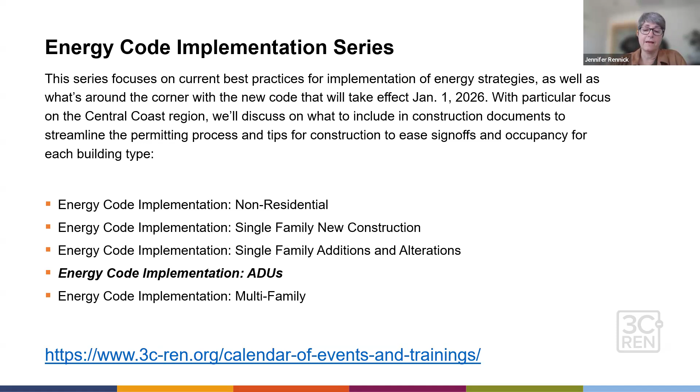Today, we're going to do the code implementation. It's for ADUs, accessory dwelling units. It's part of our 5-course series for 3C-REN. And today we do have learning units for architects. If you need AIA learning units, you get 1.5. And if you're ICC and need those learning units, you get your 0.15.

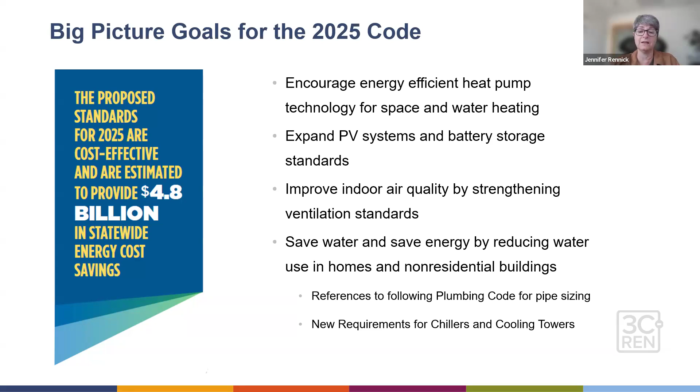And there have been updates on plumbing and piping sizes and chiller and cooling tower requirements for non-res occupancies to save water. All that together is going to help the state continue its progress, saving the state $4.8 billion. The process for adopting the energy code every 3 years is very robust. It includes stakeholders and a lot of public outreach and meetings, which we all can participate in. The state is working on the next energy code cycle, so now's the time to get involved if you're so inclined. And a reminder, the code's going to come into effect January 1st.

But big picture on the residential high-level changes, especially for architects: when you get your new energy reports for 2025, there is going to be a new metric. It seems like we were just getting everyone used to the EDR metric, which was kind of like a golf score, a ranked score. And now we're going to have a metric that is based on long-term costs. I'll have a slide there just to give you a reminder.

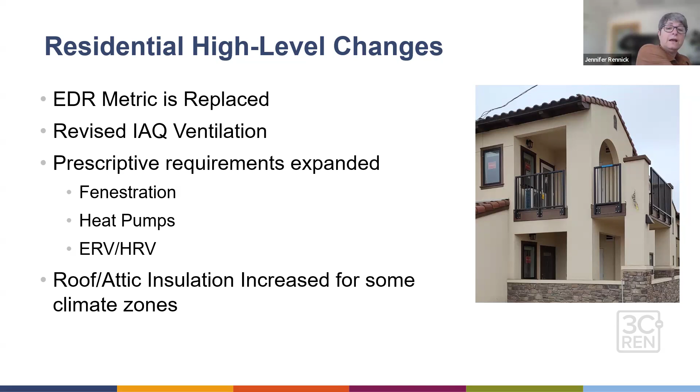So single family metrics for the performance method, and your additions and alterations when you're doing the performance method, which I'll remind everyone what that means. Performance is the computer modeling; I'll have a slide on that in a moment. But I wanted to give folks an update that the EDR score is going to be replaced with something called LSC, for long-term system cost efficiency, and it is going to be in dollars per square foot.

But I want to clarify that it's not really the cost that your client, the homeowner or the renter, is going to see. This is more looking at costs that impact the big picture for what the state is doing in terms of cost effectiveness for saving energy and resources, also including carbon impacts. The goal is to better account for the impacts of burning fossil fuels, both at the site, directly burning it for our appliances, but also as fossil fuels are still a source of electricity. We burn natural gas in generators that generate our electricity, and we're moving towards more all-electric homes and buildings, combined with increasing battery and other renewable capacities. So this new metric is to better take that into account.

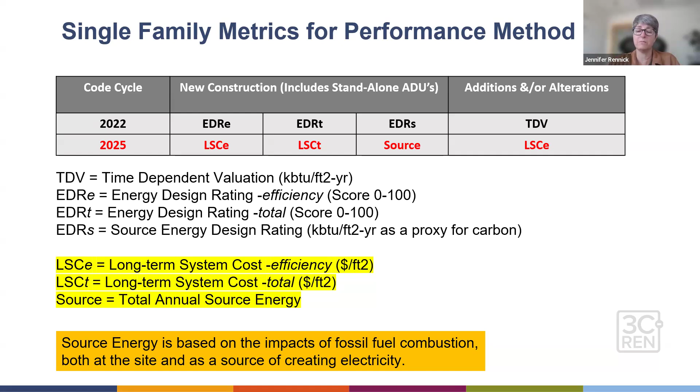HERS. A lot of you architects know you're going to have HERS raters and HERS projects, and a HERS registry to register those Title 24 CF1 documents. Under the new code, there isn't a lot of change that we'll see as architects, but HERS, just FYI, gets a new name. It's now going to be called ECC, for Energy Code Compliance Rater, but they'll still do the same envelope leakage testing, the field verifications for refrigerant charge, your exhaust fans, kitchen hood fans, HVAC efficiency, duct testing, etc.

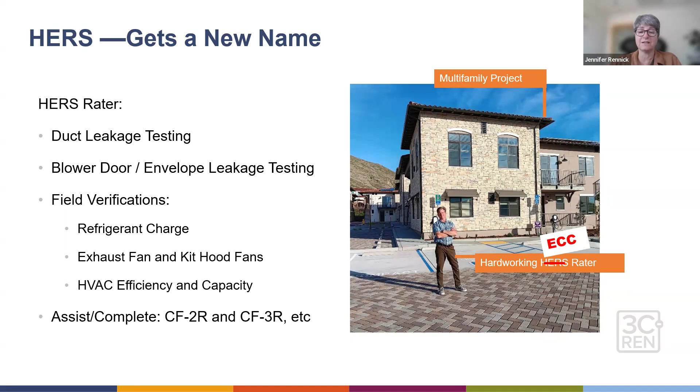And 3 terms that we use throughout, just a reminder: your mandatory requirements are energy efficiency measures that are applicable to all projects. I tried to color code the slides, so if it's a mandatory measure, you'll see orange at the top. If it's a prescriptive component package, you'll see blue, and prescriptive is essentially following a checklist. Some of the things you have to do for your projects are prescriptive, and there are measures required for that prescriptive approach that would still be considered a prescriptive requirement, even though you still need to do it; it's essentially following a checklist.

And then the performance method is your computer application or energy modeling. And I'll put that in gray. And this is where you can have trade-offs. So if the checklist approach isn't working for you, you can trade off, say, exterior wall insulation for a better hot water heating system. And as long as your proposed building's energy budget is less than the standard budget, you're good to go.

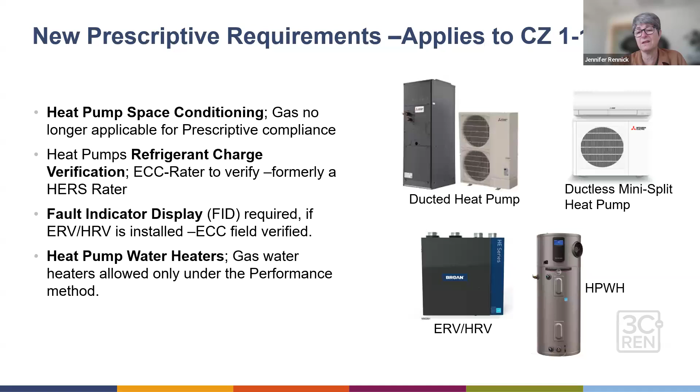And then for your heat pump water heaters, gas water heaters are still allowed under the performance method. Again, you have to use a computer method for that. But otherwise, heat pump water heaters are the new baseline. And that's where a lot of the code changes we're seeing for these residential occupancies are, a lot around the heat pump water heater.

Okay, now, unless there's a question about that, I'm going to move on into the accessory dwelling units themselves with a little bit of that background. And so some of that background, it's important to understand where now the code's going to shift, even though a lot of what we're going to talk about for the accessory dwelling units is more or less the same. And so that's the good news for the architects, that there isn't a lot that you have to worry about for the upcoming code change in January.

So our accessory dwelling units have been shown throughout the state to help with affordability, primarily because no new major infrastructure is needed. There's also opportunity for extended family to join folks by having an ADU on their property, it also gives people rental income to help with affordability, and it allows for some flexible living so that people can have the main house and then have the ADU, and they can now create a space where someone could age in place.

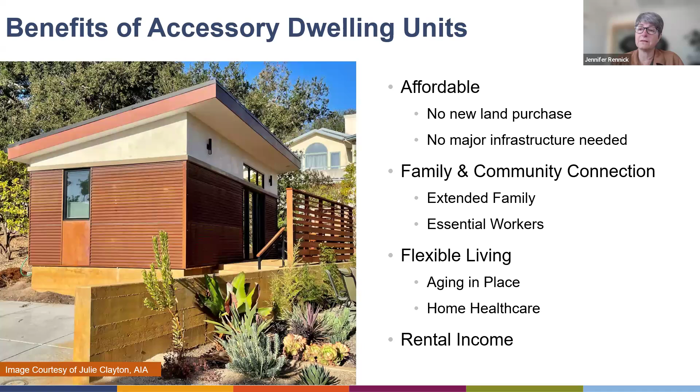ADUs have become very popular, and there are pre-reviewed or pre-approved plan sets available. We'll have a little bit more to say about this, but just as a heads up, if we have any homeowners on the call, this is available for you to use in many jurisdictions. And if we do have any homeowners on the call, then when we get to the hot water heating section, that's the place you're most going to want to pay attention, because of the plan set you may be looking at and the timing of when you are going to get your permit.

There's a great resource for accessory dwelling units at the California Department of Housing and Community Development, www.hcd.ca.gov. It's the Accessory Dwelling Unit Handbook. And I just want to give a heads up that if you've looked at it in the past, they just updated it as of January 2025. I think this is a good resource, and I noticed that some of the questions and answers have clarified some of the issues people are having with building ADUs, especially around multifamily projects that have ADUs and what's allowable.

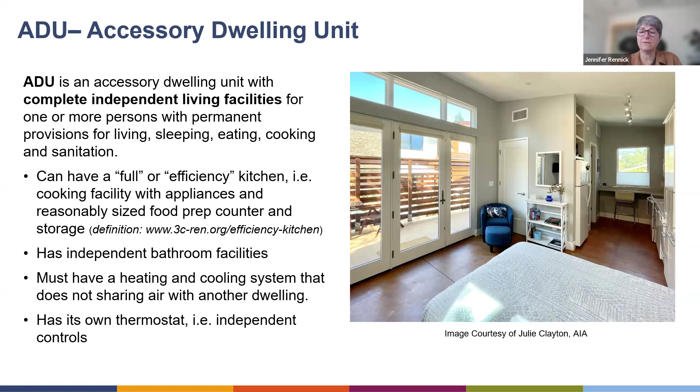And in this picture, thank you, Julie Clayton, local architect, there's a bathroom behind the refrigerator and a closet there, and then a small efficiency kitchen on the right-hand side, and then the rest of the living space. So that all met the definition of accessory dwelling unit.

The junior accessory dwelling units, JADUs, a lot of times these are conversions of existing space, as long as it's not greater than 500 square feet and it is contained entirely within the existing structure or proposed single family residence. So it's possible to have a new construction build that's single family, but within that whole single family, you have a portion of it that is delineated as a junior ADU. That's okay. And you can have an efficiency kitchen in it.

You do have to have a door to the exterior. And it's okay to have another door that goes to the interior of the space, and it can have its own bathroom, but it may also share the bathroom with the rest of the house. And then that kind of meets the definition of junior ADU.

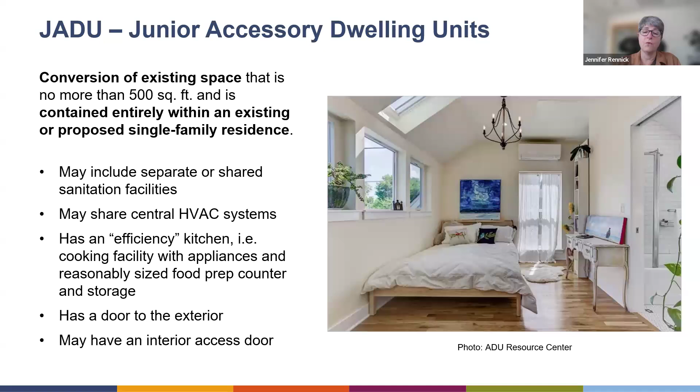Why that's important is because it comes back to how we think of ADU and junior ADU types, and the language of how policy and planning departments talk about it, how it's regulated, but then how that comes back into play with the energy code, so you know which set of requirements you're going to use for your ADU or your junior ADU.

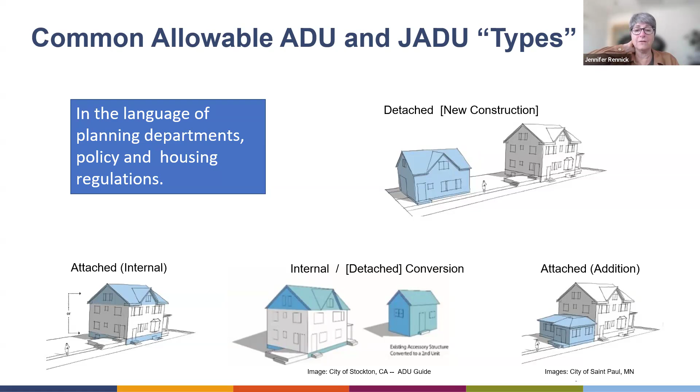So if it's brand new construction and the building's completely detached, then that has one definition. But if it is attached but internal, it could be a junior ADU, could be an ADU, but then the energy code is going to look at it a little bit differently. And the new construction detached build is considered new construction, so you're going to fall under the new construction single family.

But the other types of ADUs, for example, it could be a detached building, but it's converted because the building existed already. So you convert an existing workshop or an existing garage. Those are considered additions. And these alterations and additions fall under a different part of the energy code and have different requirements.

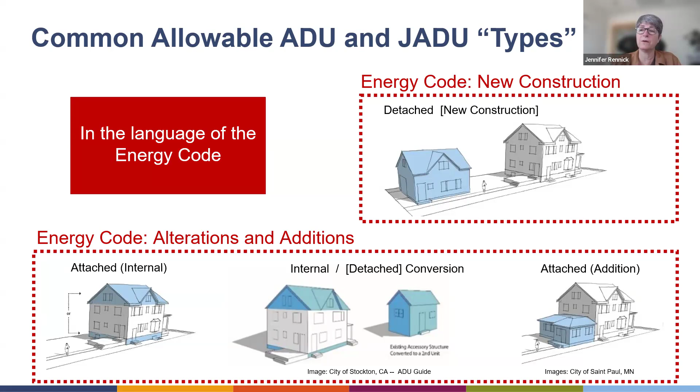For the new construction standalone structures under the energy code, this question comes up a lot for us. And the question is, do I have to include solar panels on my ADU? And the answer is yes, unless a size exemption applies.

But otherwise, new construction, standalone, new structure, you would need to comply with all the requirements for the envelope, the ventilation, your heating, cooling, hot water, be electric ready if you do install any gas appliances, be battery storage ready. And yes, you would have a PV solar panel component.

Now, there's three other scenarios, and this is where people get hung up a little bit, and they're not sure which part of the energy code to use. And that is if you're making an addition, conversion, or alteration. So for example, if you are just doing an addition, but it is an independent living quarters, then it is new, quote unquote, new construction to the homeowner, but to the energy code, it's an addition. So you just follow the additions. I think most architects on the call would totally understand that.

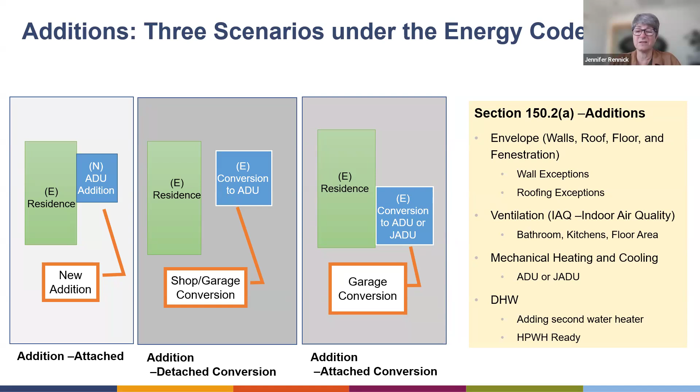And then we are going to hit on kind of the difference, what the wall, floor, roof requirements are when it's an addition versus a brand new standalone construction. Now, for a project to qualify for an alteration, the real key here is to double check that the JADU isn't increasing the space more than 500 square feet. So it has to be built within the walls of the existing structure.

So in this case, for your clients, we're really saying it's like an interior remodel. And in that case, it's not increasing the conditioned floor area. And so that's important because under the energy code, then it's considered an alteration. And there are wall exceptions, ceiling exceptions, and then it does impact what's required for the ventilation and your heating cooling system, and whether or not you choose to have a hot water heater replacement.

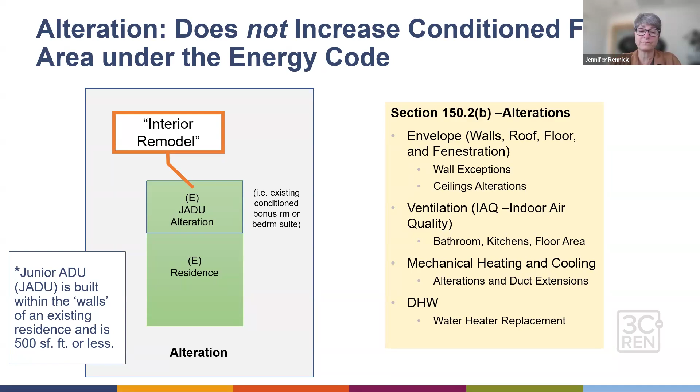Anything on that, Grant, you want to add? I think I covered it. No, that designation comes up all the time. So if anyone has any questions about it, it's a good one to make sure you're clarified on. We get it specifically for the PV consideration pretty consistently.

Yes, and when we say questions, did I fail to mention that Grant and I are both energy code coaches for the energy code coach service that 3C REN offers? So when we say we get a lot of questions on that, we're really thinking about what kind of questions are coming to us under that energy code coach service. And the things I covered are a lot of what people need a little help navigating. And even after they've heard all that, sometimes it helps to just shoot us a code coach question to clarify. We had a follow-up on that.

Tally. An existing detached accessory structure is demolished due to substandard conditions and rebuilt in place. Is this new or can it be considered an addition alteration? Well, Grant, how about you answer that? No, I'm kidding. I always defer to the AHJ who is classifying the permit because it is common practice.

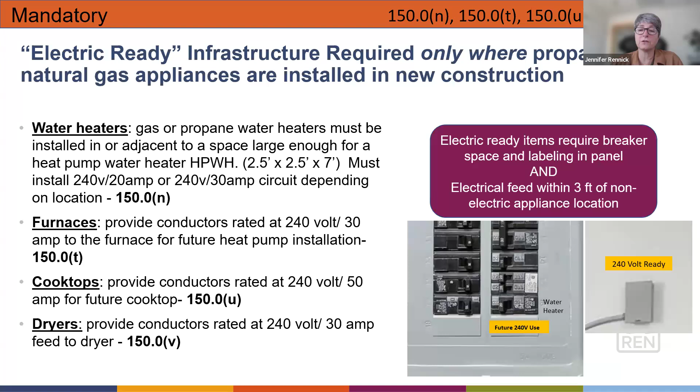It could be induction or electric resistance. And same with the dryers. If you do provide a washer dryer for the ADU and you end up going with gas, you need to make sure that you at a later date can swap that to an electric dryer. So that still all applies.

And the photovoltaic system, solar system applies. And the kind of cutoff we see with ADUs is whether or not the required PV, once you follow the formula based on your conditioned floor area, and that does include the exterior walls in that conditioned floor area, and based on how many bedrooms you have in your ADU. And then if that PV system size is smaller than 1.8, you technically wouldn't have to install the PV system. It would be exempt.

So as an example, this one's kind of borderline. If you were building a 1,000 square foot ADU in climate zone 6, so in Santa Barbara, do the formula, you would end up with a PV panel size that's 1.82. So it's just beyond the threshold. So you would have to install the solar panels. And let's say you had a 300 watt rated panel, 6 panels would cover that requirement. The panels actually produce more than 300 watts. So you could get an idea of about how much space you need to allocate for that solar system.

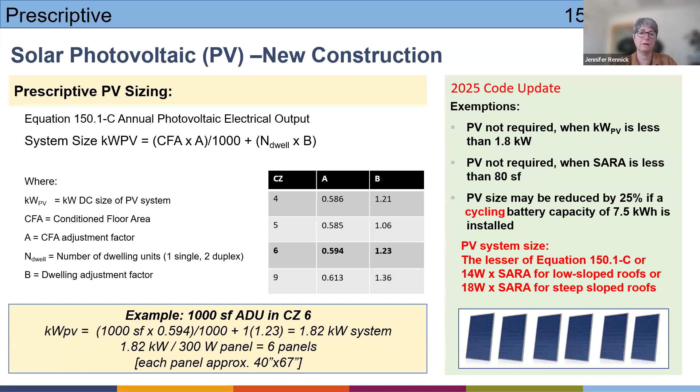Battery ready, meaning you don't have to install a battery. It is a credit option. You can install it, but nonetheless, you do have to allow for space for the ability to more easily add a battery at a future date. And so this part of the code section goes through some of the requirements for that.

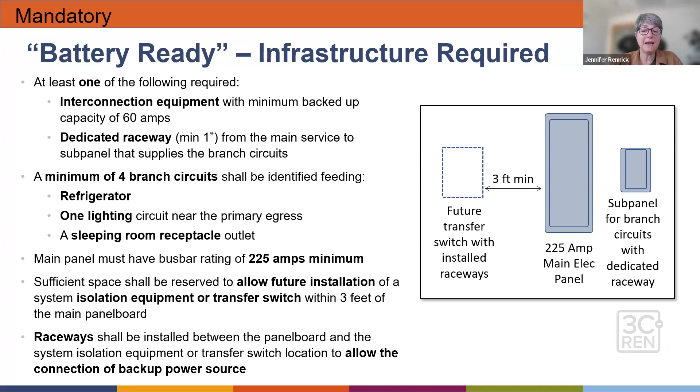And then one of the things that has come up with some of the architects that we've worked with in the area, and I'm sure this comes up for other people, is with a small ADU, there's also less space on the ADU for some of these things. One project we were consulting on in the Grover Beach area, their solution was just a lot of this went on the main house. For this 225 amp main electrical panel requirement that kicked in with new construction, it's okay to upgrade the panel on the main house to 225 amp, and then give the new ADU a sub panel. That's okay.

For performance pathway, so you're doing the computer modeling and you've decided you're going to go ahead and install the battery anyway. By installing the battery, you've met the battery ready requirement. So you don't have to do anything else but get it installed. But if you do install it, the minimum battery cycling capacity is 5 kilowatt hours. It does need to interface with the grid, and the performance credit's relatively small, and the battery with the PV system combined can be cost effective.

So the whole idea is to increase a household's electric generation and storage to be able to offset the electrical grid usage and address resiliency, so that instead of firing up gas powered generators throughout the state, called peaker plants, to produce electricity in the evening, if more people had batteries installed with their solar, then they could use their batteries for that evening peak energy use instead.

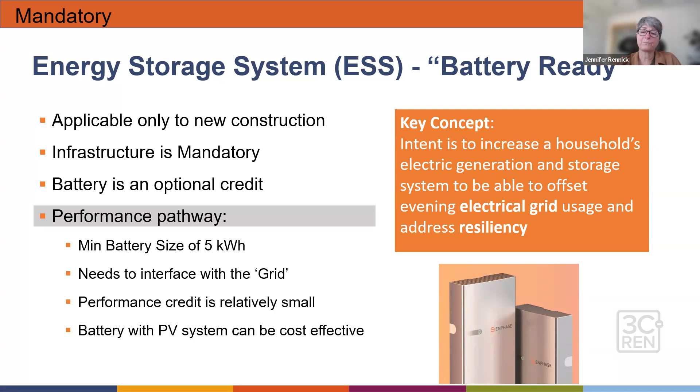Now, for the 2025 code update, they've just kind of clarified the definition for that battery system self-utilization credit, and it is related to the new metric LSC energy budget, and that added battery can be used to offset the building efficiency part of your performance score. So what that means is that now you can use that battery under the new code coming up to offset other measures that were less energy efficient. So that might be useful for people under the new 2025 code.

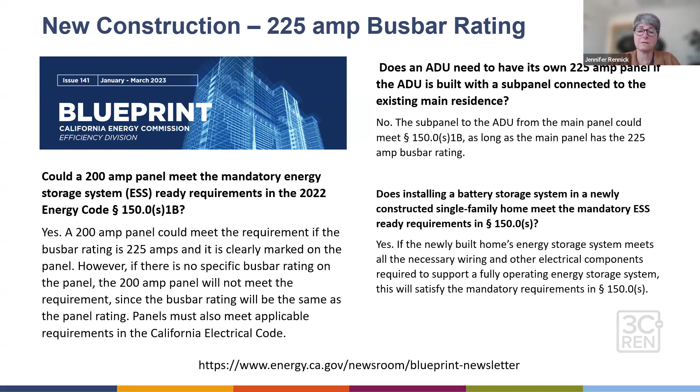And then kind of a reminder, if you're not familiar with the blueprint, it is a California Energy Commission publication that's got a lot of helpful information on questions and answers related to the energy code. And this particular edition, I took some excerpts from it, and it just clarifies that, for example, you could use a 200 amp panel for the ADU and have the house have the 225 amp panel. And there's other clarifications with the battery, so that if you install the battery, it qualifies as your battery ready, for example. But you're going to get a copy of the slides, and this will be in there for you as a reference with the link to all of those newsletters.

Grant, anything you want to say about the batteries, PVs, new construction, or anything? I was just gonna add that blueprint is a really great resource. If anyone's unfamiliar with it, it's not the most easily searchable, because they just publish them and have them for download by month. So you kind of have to either stay on top of scanning them or dig through them to look for answers. But a lot of the real world application interpretations of the code and clarification are posted in that blueprint. So it's a really great resource when you're working in this consistently.

Yeah, that's right. So we like it, but the benefit to you all is we can read all this, and then you can call us through the Code Coach service. And so that's another way to get access to it.

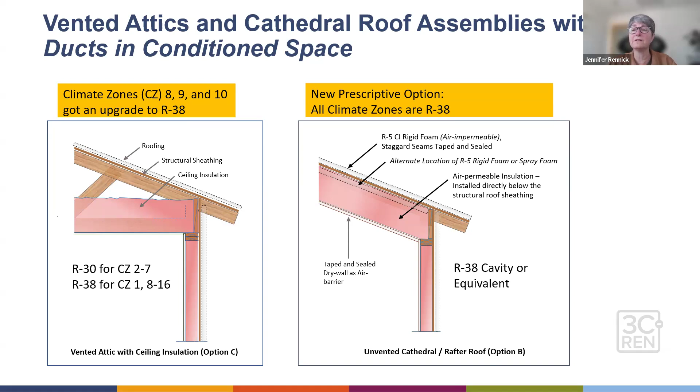Okay, so now specifically to kind of touch a little bit on roofs, but we're going to spend a little more time on walls and windows and how that looks for the new construction, the additions, and the alterations, because those things change depending on what type of ADU, or if it's a junior ADU, the alterations might kick in. So just FYI, for our roofs under the new 2025 code, basically climate zones 8, 9, and 10 got an upgrade to an R38 attic insulation as opposed to an R30. But most of the climate zones that we're dealing with on the Central Coast are 4, 5, 6, and 7. We still have an R30. And then there is a new prescriptive option for all climate zones where you can use an R38 cavity or equivalent if you're going to do an unvented cathedral rafter roof situation. And so I included a couple details for that, just kind of a heads up on the 2025 code.

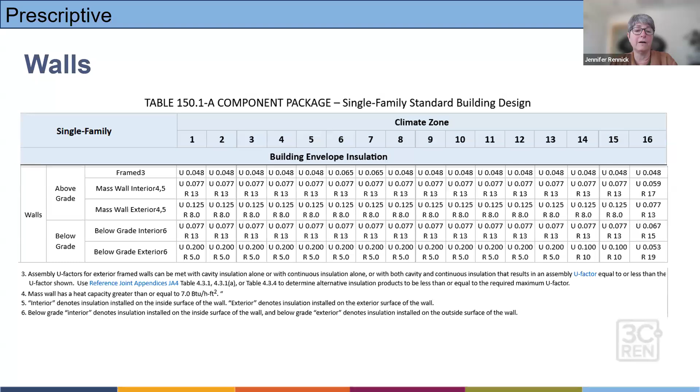Concerning walls, prescriptively, which becomes the baseline for the performance method, there hasn't been too much of a change, so you don't have to be too worried about that, especially for our Central Coast climate zones. But mostly we're seeing ADUs that are framed walls, and so based on your climate zone, the requirement is going to be a U-factor. So climate zones 4 and 5, for example, a U-factor 0.048. Now with climate zone 6 and 7, it's a bigger U-factor, means less insulation required, a 0.065, and then all the other climate zones are also the 0.048.

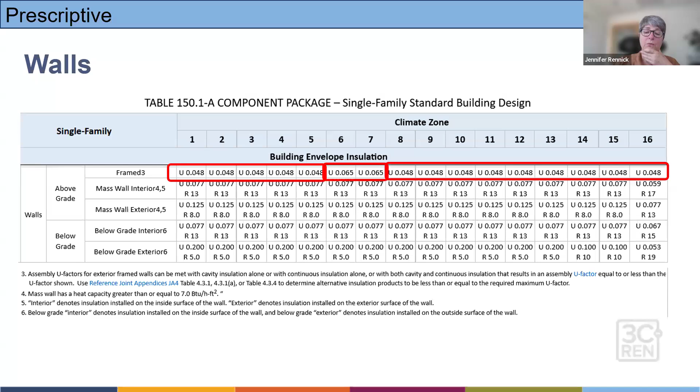But what does that translate into? What do you have to do as an architect? Well, it's pretty straightforward. If you're in climate zone 6 and 7, so Santa Barbara on the coast, you just can build your ADU with a 2x4 wall and an R15 cavity fill and an R4 exterior insulation, and you're done. But the problem is we're finding a lot of folks are not sure still how to detail with the exterior insulation. So they want to use the performance method to trade it off and not have to do that. And so that's where we end up seeing a lot of folks go with the performance method, and they're going to choose other things to do that are more energy efficient. And same idea with climate zones 1 through 5 and 8 through 16. You're going to bump up to a 2x6 wall, cavity fill with either R20, 19, 21, or 23, etc.

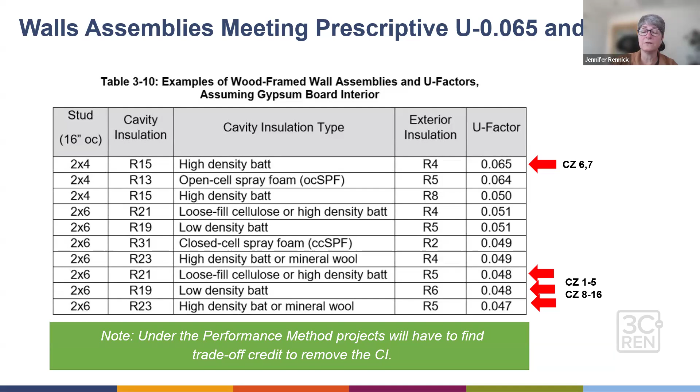And then you would have an R5 or an R6 on the exterior of continuous insulation for that. What this looks like in practice is an exterior rigid board type of insulation over your structural sheathing and usually your house wrap of some type. And you can use a variety of products, and there's some great details even that rockwool.com and foursevenfive.com have put out to help designers, architects, builders understand what that looks like.

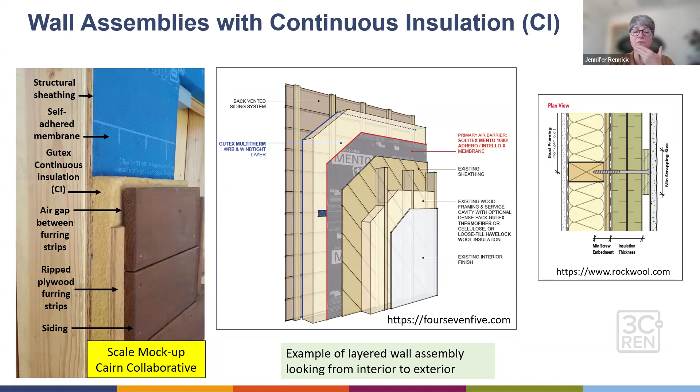But like I said, most of the time we're seeing architects still wanting to trade this off. And mostly it's because they're not sure how to deal with the window detailing. But once you figure that window detailing out, it's really straightforward actually to do continuous exterior insulation.

For the windows and door requirement, there's been a little bit of a change for 2025. Right now, the requirement for a U-factor for windows in all the climate zones is a 0.30. And all the window manufacturers are making windows that come in a 0.30. A lot of the manufacturers now are making windows with a much lower U-factor, which will be easy to meet the new 2025 energy code, where a number of the climate zones have been updated to a 0.27. So lower U-factor, better windows.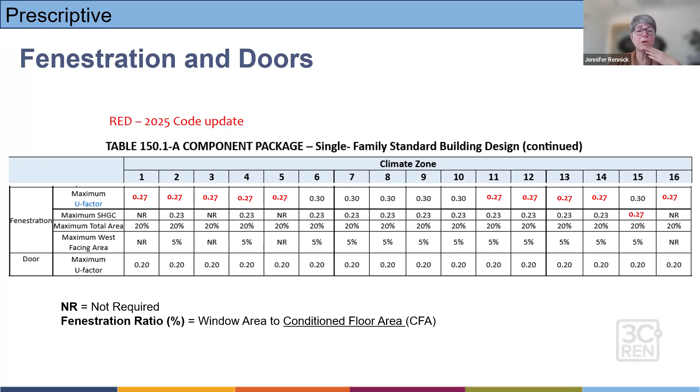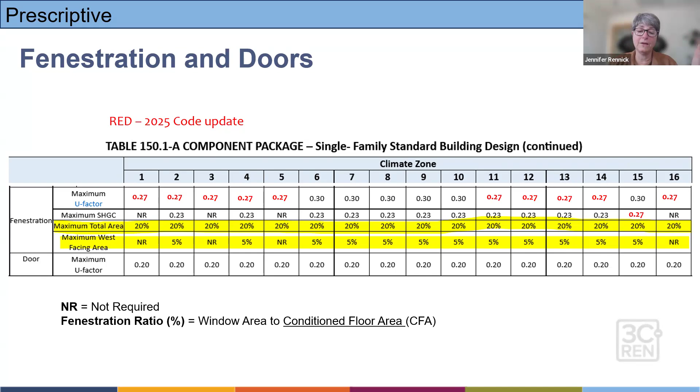Now, when it comes to ADUs, because of their small footprint, what I've been noticing on your Title 24 compliance, you're still being compared to the prescriptive baseline, and it's the total amount of glass area being 20% of the floor area that can be problematic in terms of compliance, and in certain climate zones, like climate zone 6 and 7 and 4, for example, it should only have 5% of the total floor area facing west. That can be tricky for an ADU, and I have a sketch of why that is in the slide after next.

But before we do that, I just want to remind folks, because of wildfires, there is an exception for the mandatory requirement of the glazing, and you can use windows that don't meet these requirements, because there's a clarification that windows and skylights installed in buildings meeting the 2025 Title 24 Part 7, which is a new part that's coming out, a new book you're going to be getting for your whole Title 24 package, where buildings are located in fire hazard severity zones that are high or very high, you can now use fire-rated windows, and you get an exemption.

And it's important to know that, because a lot of the fire-rated windows have U-factors around 0.42. And this makes a big difference, because we're talking about climate zones now decreasing that U-factor to 0.27, and under the current code it's a 0.30. So the fire-rated windows are going to be wildly off, but there is an exemption for that.

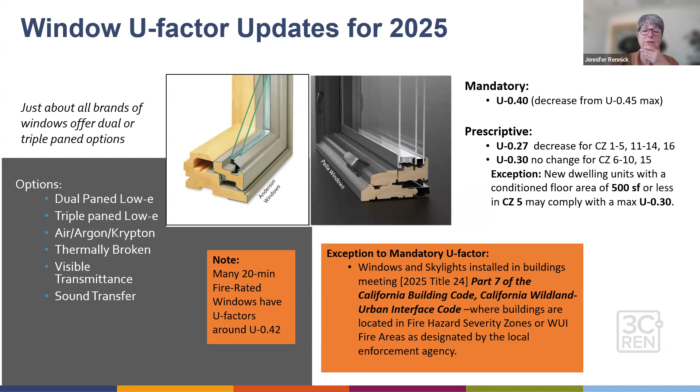For the prescriptive example, so let's say you're not in one of those fire-rated zones and you're complying with everything else prescriptively, or your standard baseline is being compared to the prescriptive. A lot of times we end up seeing the ADUs having to go with the performance method, because the amount of glass allowable for the ADU isn't acceptable to a lot of the designers and the homeowners.

And so take, for example, you have a 330 square foot, very small ADU, and you may end up with a total of 65.5 square feet. 66 square feet's allowable. Okay, it complies, but when you look at it, you're really ending up with some small windows. Like you might have three 3.5 by 5 foot windows, that's not bad. But then that just leaves one 3 foot by 3 foot window, another 3 foot by 1 foot window, and a 1 foot by 1 foot window.

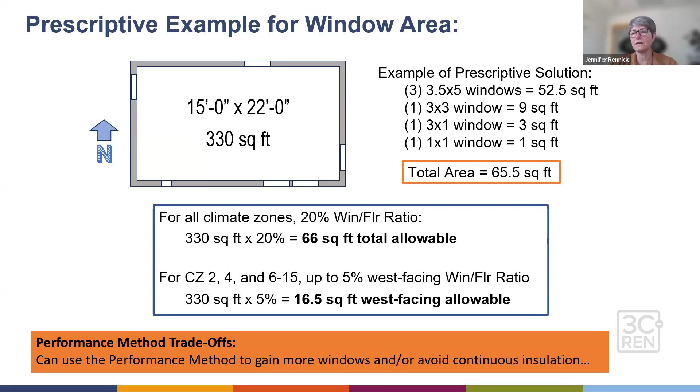So if that doesn't work for folks, then you're going to want to use the performance method to get more glass, more view, more aesthetic perhaps into your project, which means automatically you have to do the performance method. And if you're also trying to trade off that exterior insulation, that's where we're seeing some of the ADUs having some trouble passing the code. So I think you just have to be strategic.

For your ADUs that are considered additions, the requirements for the walls are a little bit different. And this kind of comes back to that question full circle: what if you're tearing down all the walls? Really, the question you have to ask is, are you remodeling, reworking those exterior walls such that you will be removing and replacing the siding?

If you are, then you are required to meet those new construction standards, which means you would be using the continuous insulation to meet those U factors on those wall assemblies. But if it's all done from the interior and the exterior siding is all staying intact, then all you have to do is take your 2x4 wall and put R15 insulation in it, and take your 2x6 wall, if that's what's existing, and put an R21 insulation in it, and you're good to go.

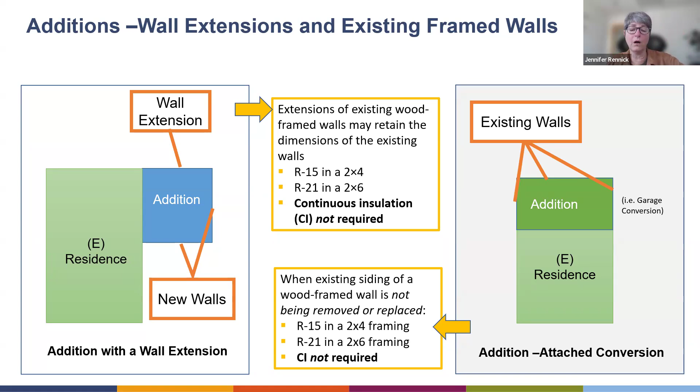The other exception is if you're doing an addition where you have a wall that is in alignment with the existing wall, you can just do that same formula with R15 in a 2x4 wall, or R21 in a 2x6 wall, and you don't have to add that continuous insulation. The code isn't going to make you bump out the new wall when the rest of the walls are built the other way.

And so again, that blueprint had a great clarification, and they visually drafted up what that really means for a wall extension. A wall extension can be in plane, but it can also go up vertically. If it's truly in alignment, it's a wall extension, and you don't have to have the continuous insulation.

But if you take the new addition and give it architectural interest, and you bump it in and create a jog in the wall, then yes, that new wall would prescriptively require the exterior insulation. But that's where you get into the trade-offs. Trade it off with something like a more energy efficient hot water heating system for the whole house, or insulate all of the attic space for the whole house and the addition.

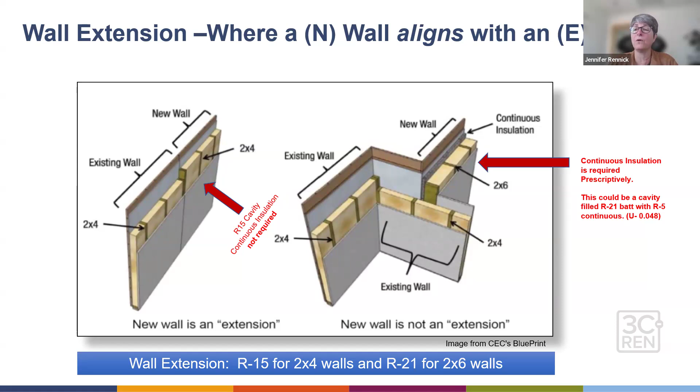For alterations, existing walls with window replacements, we get a bunch of questions about these through the Energy Code Coach, and we've done some workshops on this for some of the authorities having jurisdiction. I created this chart so folks could get a quick summary of the U factor and solar heat gain coefficient for a replacement window or skylight. If it's 75 square feet or less, you have one set of requirements. But if you're adding new fenestration, or your window replacements are greater than 75 square feet, then you're going to comply with the new construction requirements.

An example of that would be if you have an existing master bedroom and you're converting it to a junior ADU. As you swap out and create new windows, you get into the wall framing. Because it's altered, you only need to replace a 2x4 frame with R13 insulation. You could do higher if you wanted, 2x6 and R20, but you don't have to. And then the windows have changed, however, under the 2025 code.

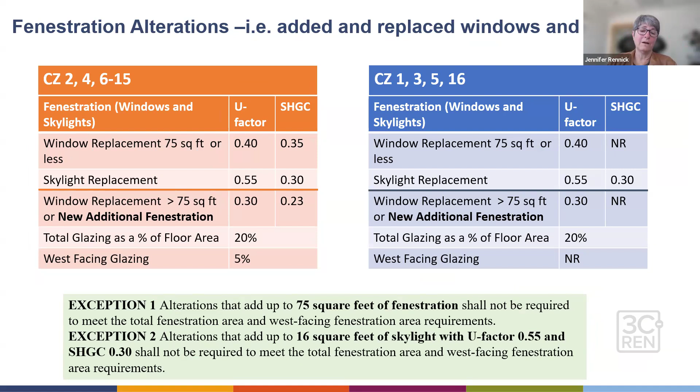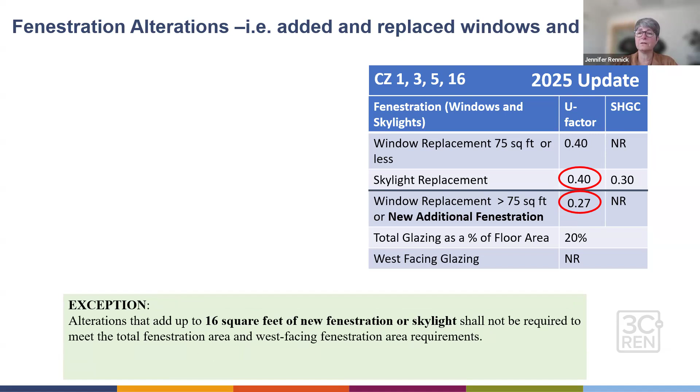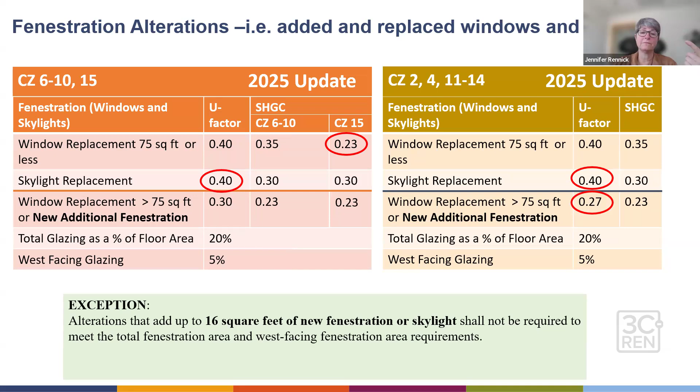Then the tables are broken out now: climate zones 6 through 10 and 15, and climate zones 2, 4, 11, 14. In this update, climate zone 15 now has the updated solar heat gain coefficient, the skylight replacement is 0.4, and the window is 0.27. But I'll double check those numbers, because I think I made a typo in climate zone 15. I'll fix that before you get the copy of the slide deck. Sorry about that.

That's probably the most tricky or kind of nuanced. So you really have to look at what climate zone you're in if you're trying to just meet the minimum requirements for window alterations. However, because there's so many window types available that all meet the new construction requirements, in my opinion, the easiest thing to do is just meet the new window requirements and you're done. But sometimes I know that folks have a hard time with that because they're not going to replace all the windows in their projects, and they're trying to get a window that matches what was existing.

For indoor air quality, kitchens all have to have a hood exhaust. It's just a requirement. If you have cooking, you need a hood. We still see periodically folks installing combo microwave hoods where it takes the air off the cooktop and just kicks it back into the space. That does not meet the energy code nor ASHRAE 62.2 for quality air. So just FYI, also authorities having jurisdiction, that's no longer allowable. It hasn't been for a while. The kitchens have to exhaust to the outside, just like your bathroom has to exhaust to the outside.

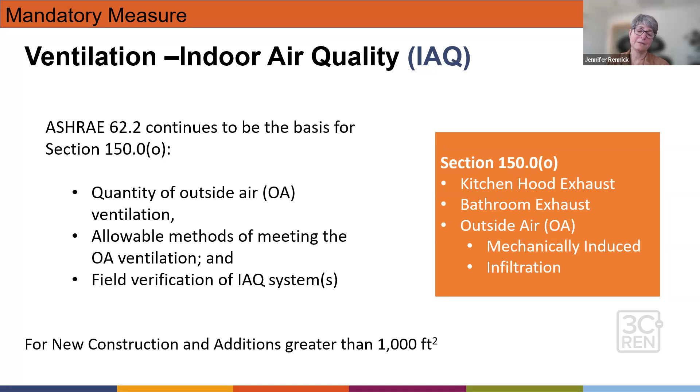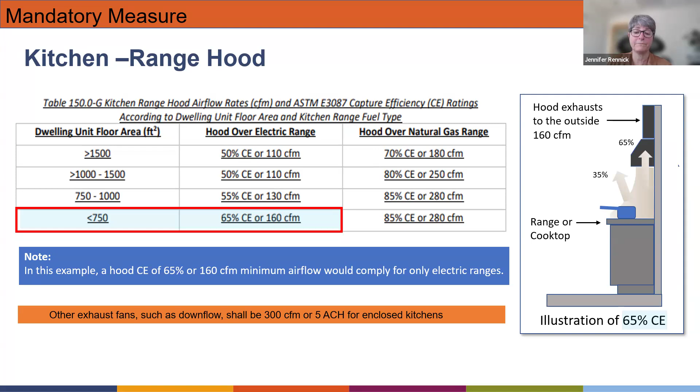For new construction and additions greater than 1,000 square feet, all of these requirements apply. It's where you're at an addition under 1,000 square feet that it's a bit nuanced. The new requirement for the kitchen hoods is based on the size of the dwelling unit floor area and whether or not it's an electric range or a natural gas range. Natural gas ranges have higher CFM ventilation requirements than electric ranges. So if you're doing an ADU and it's a smaller space and you don't want a really large hood, then consider using the electric or induction range, and then you can use a smaller hood capacity. You're going to get a copy of the slides.

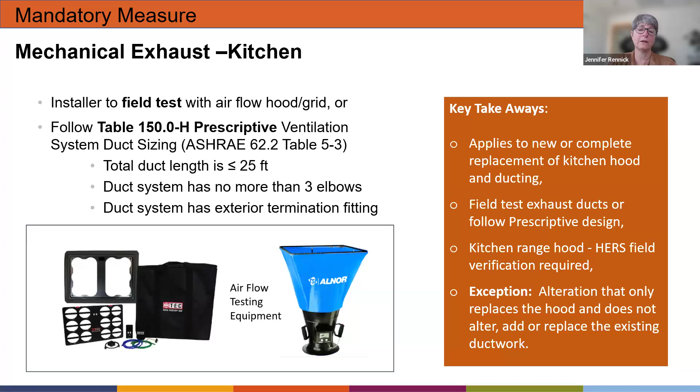That table's in there. And then new to the 2022 code was including field testing of the exhaust ducts following a prescriptive design for that kitchen hood. What EPA and California Energy Commission discovered is that a lot of kitchen exhaust hoods had a lot of elbows, excessive duct length, and so the kitchen hoods weren't really venting like they were supposed to anyway. And especially if that vent hood didn't have a high CFM and was over a gas range in a small dwelling unit, there was a huge buildup of air pollutants in that space. And they did have over a number of years a positive correlation between those situations and cooking with gas and asthma, especially in children. So this is really to improve the health, safety, welfare of folks.

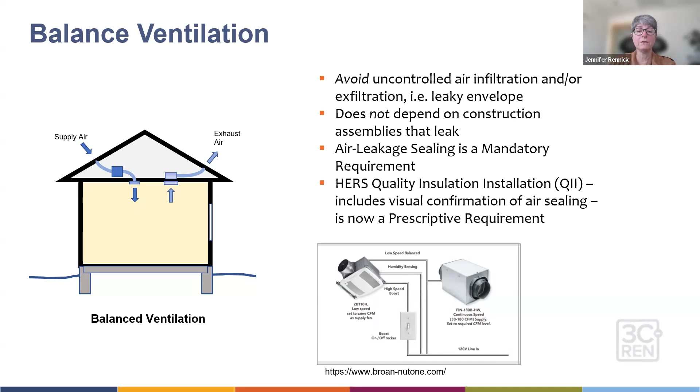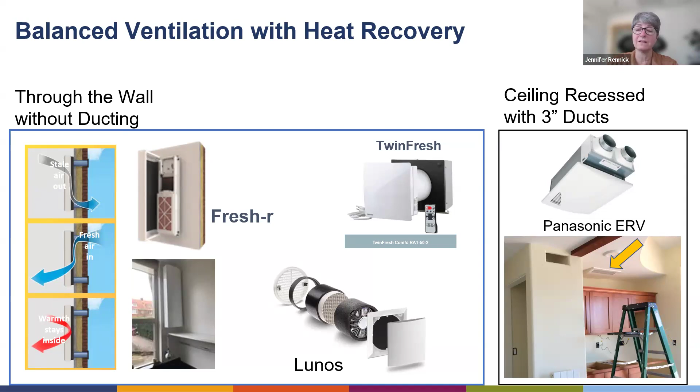Balanced ventilation is what we recommend. So we're starting to see more projects where they have the exhaust fan operating at a low CFM, like 20 CFM continuously, and then having it hardwired to a small supply fan that also brings in fresh outside air. And both of these systems you're able to turn off if it's poor outdoor air quality. There's also really small balanced ventilation with heat recovery systems that also bring in the fresh outside air. But the advantage of some of these newer products for ADUs is that they're through-the-wall solutions. You don't have extensive ducting, and it is often helpful when you just want to do spot ventilation and you only need a small amount of outside air because it is a relatively small dwelling.

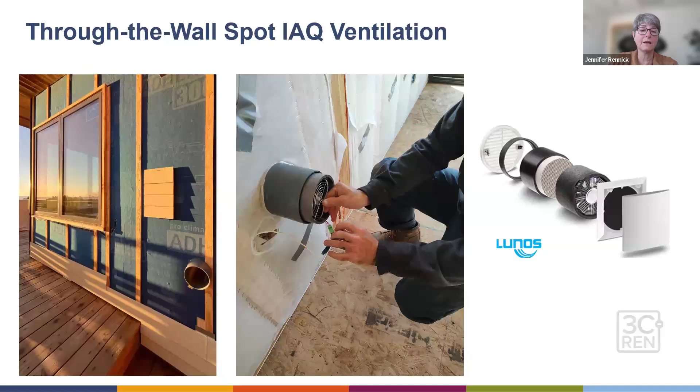And this is what this Lunos brand looks like during construction. And here's some examples from current collaboratives work where they just built a small ADU in San Luis Obispo, and you can often pair them together. In this case, the two on the left, they're relatively close to each other. We usually like to spread them out much further, but there were other reasons why these two units couldn't be spread out, but it shows what the inside looks like with a cap, and then the outside just has the small ventilation.

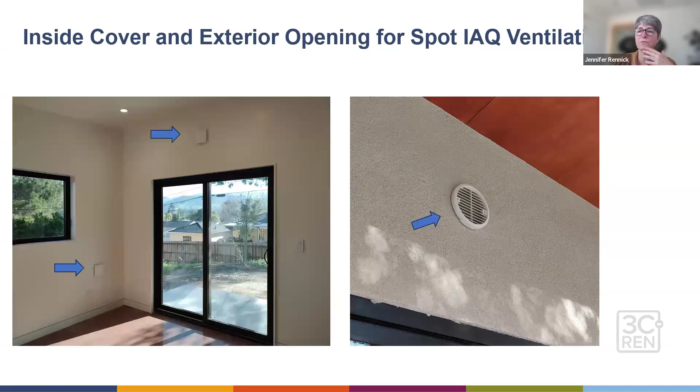And the tube itself is about 5 inches in diameter, I think. It's right around that size. There is a performance credit for that fresh outside air, but the product has to be HVI certified to get this extra credit. So what we're seeing with the small spot ventilation is they're not HVI rated yet. You don't get extra credit for the fact that they have energy or heat recovery for the ADUs, but it's sometimes just a better solution. And so we see them getting installed. They still meet your outside air requirement. You just won't get any extra credit for them in the performance method.

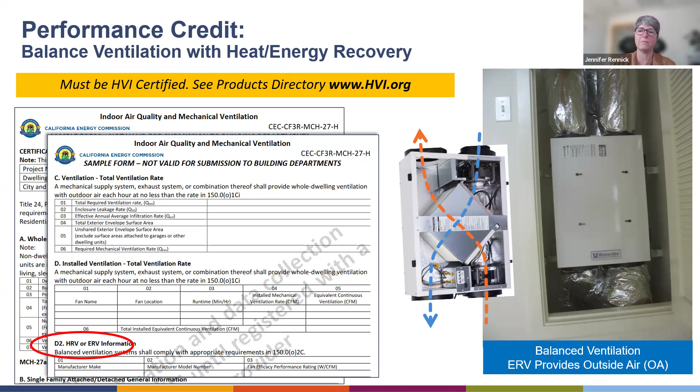For hot water, moving right along, currently the requirement is you can use a heat pump water heater. You could install a gas or propane instantaneous water heater. And so depending on which climate zone you're in, that could be your prescriptive baseline. And then if you wanted to do something different than that for the climate zone, you could do the computer performance model. There was also a carve out for new construction. So like your ADU, 500 square feet or less, and additions 500 square feet or less, you could use an instantaneous electric water heater with a point of use distribution.

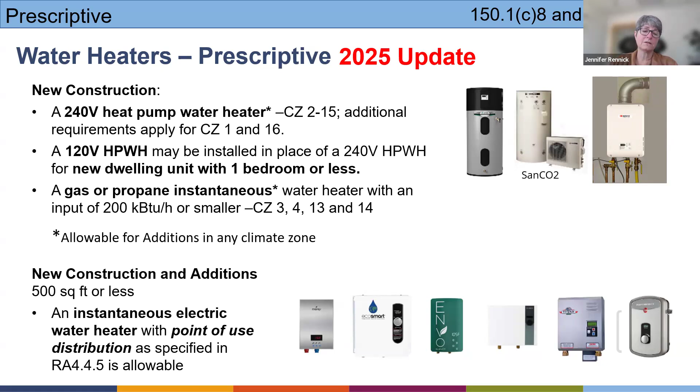So good thing under the 2025 code update for the new construction additions, they eliminated the instantaneous part of the credit. But for the rest of those other climate zones, with the 2025 code, you're just going to use some type of heat pump for your hot water heating, period. Unless you do the performance method, then you could still install an instantaneous gas water heater. And then for those additions or new construction, you can actually use small electric tank type or an electric instantaneous. But in either case, you have to use what's called point of use distribution.

And what that means is that that water heater, whether it's the small tank type or an instantaneous water heater, it has to be right there next to your shower, your sink, your washer. You know, you could have a setup like that. And if it's within certain distances based on the piping diameter, then you would comply with the point of use requirements.

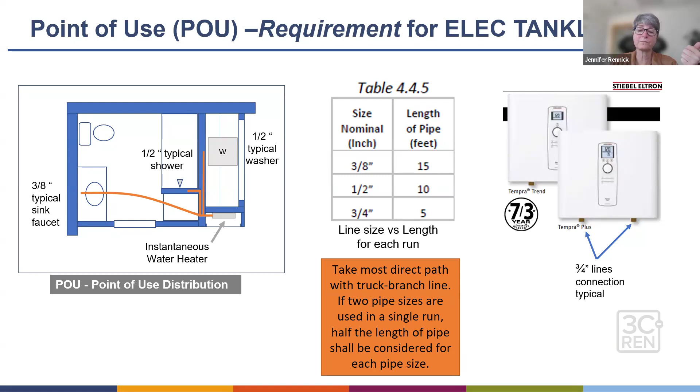For heat pump water heaters, let me reframe that. If you choose to install a gas or propane water heater in your new construction build, it still has to be heat pump water heater ready. And you're supposed to show that you have a designated space of 30 inches by 30 inches by 7 feet, so you can install a future heat pump water heater. But this is the big caution, the big but, for the architects. When you are doing your drawings, just because the energy code said you need a 30 inches by 30 inches by 7 feet space, that doesn't actually give you enough space really as a closet to be able to install a heat pump water heater.

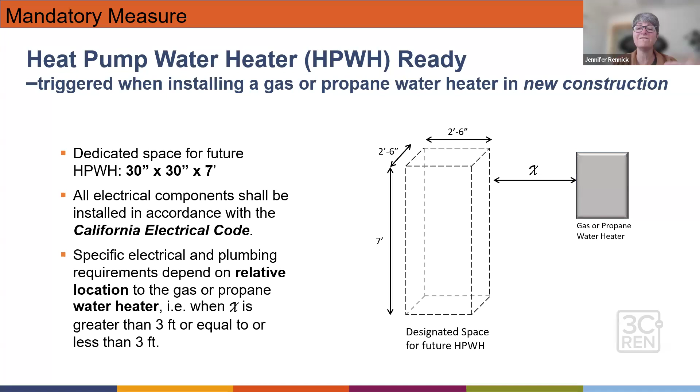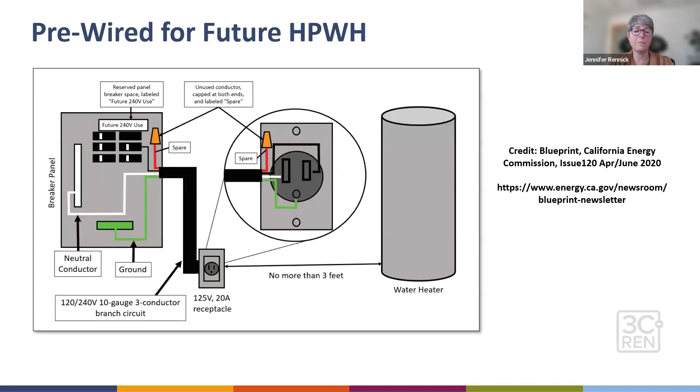So we're finding this with new construction builds and the electric ready builds, that more space is really needed for your heat pump water heaters in order to physically just get the thing installed. And then there's a lot of other ventilation requirements that go with it, and I'll hit on that next. But a lot of folks, they're not really familiar with heat pump water heaters. They're not sure what all's required. So for pre-wiring for the future heat pump water heater, there is a good Blueprint edition that helps clarify that. And I excerpted this with the link to it, so you can go and learn more about that at that site.

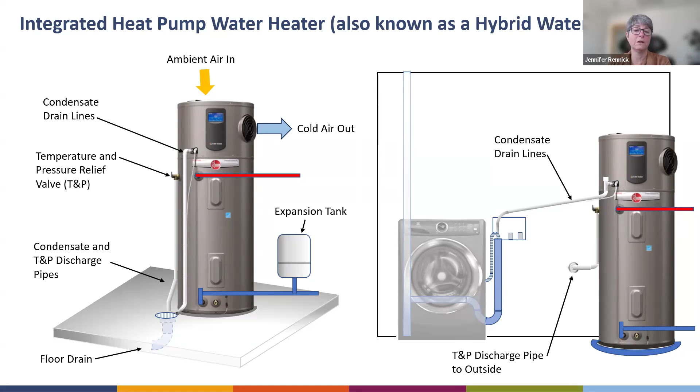And then just to give you some visuals of all the things that are required for heat pump water heaters. You also hear them advertised as hybrid water heaters. You need to make sure that there is a way to take care of the condensate drain and the condensate water that comes from a heat pump water heater. That's also in the code to say, hey, you got to design for that. Sometimes we see that forgotten. You'll see a heat pump water heater with the condensate line coming off of it, and it goes nowhere. It needs to go to a floor drain, or it needs to go to some other approved drainage. Some of the design considerations: we used to say the heat pump water heater needed 750 to 1,000 cubic feet of volume, or use a duct kit.

But the newer models, some of them are only needing 350 cubic feet of volume around them. Old temperature ratings were between 45 degrees Fahrenheit and up to 90 or 110 degrees Fahrenheit. Now the newer models can operate as low as 35 degrees Fahrenheit and up to 120 degrees Fahrenheit. And because they have these cutoffs, the heat pump water heaters under the 2025 code are required to have a backup electric heating source in case the heat pump can't operate, in case it's outside of those requirements.

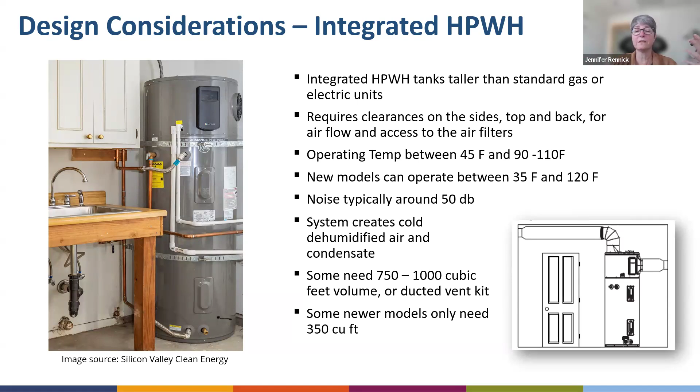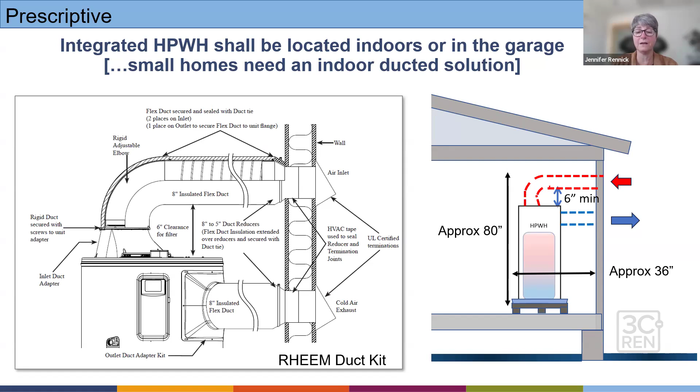And the other big thing we find is that when folks do install the heat pump water heaters, and if they add ducts, that's great. But once the electrical's connected, sometimes they run the electrical or the duct so close to the top of the tank that the homeowner or occupant or maintenance person cannot pull out the filter, the screen that is there to protect the fan coil inside the heat pump water heater. So include the sketch just to remind folks, architects, to put on your drawings or pull the specs from that heat pump water heater and just help clarify that you need the 6 inches minimum.

I just wanted to add, yeah, what I've been emphasizing with all our clients is the need to actually select or be working with a make and model unit that really solves a lot of the problems that we're finding in the field. As you saw in the previous slides, there's a number of things like the required ventilation volume; the airflow volume is changing. When we first started talking about these units, it was like 750 plus to 1,000, really designed to go in a garage. And just in the last few years, these are coming out where the required air volume is lower. I think Jennifer just had some units out there that only need 350.

That decision, if you say, oh yeah, 350, but then you just don't specify that specific unit and the builder goes to Home Depot and grabs a Rheem, that installation location and how it was designed might just not work. And now we're fighting with it on the construction side, in the field. So really just emphasizing you're supposed to select the specific model in your energy reports, having that on the plans, having it in as many places as we can, followed through. When you're doing those duct adapter kits, the manufacturers are putting out their specs because they're selling it with the unit. So they often provide diagrams or minimum clearances to help you actually design for that unit. So that's kind of my big takeaway I'm pushing on these.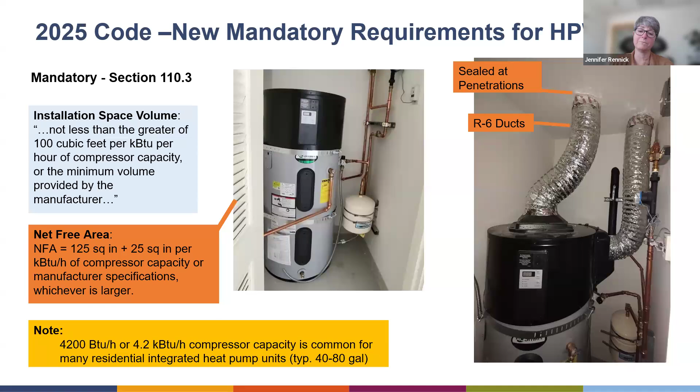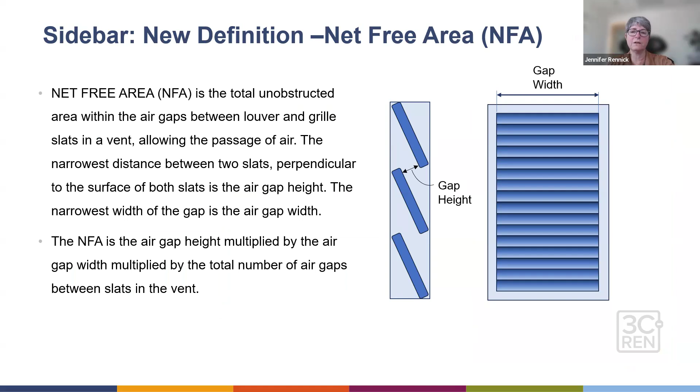And so you're going to want to, like Grant said, look at the actual unit and make sure you're meeting that requirement. And then I included this little sidebar here on the definition of net free area from the code. So you can look at that when you calculate it.

And then in the latest version of the blueprint diagram, this is coming up. So they have this clarifying diagram, but they didn't include any of the math behind what they're showing. So I just added this for your benefit. I call it math help, just so you can see where these numbers are coming from and how that matches with what the code is saying. And we're happy to help anybody with this stuff during Code Coach.

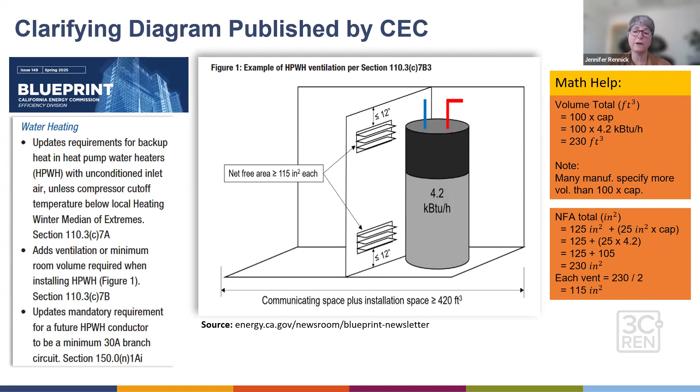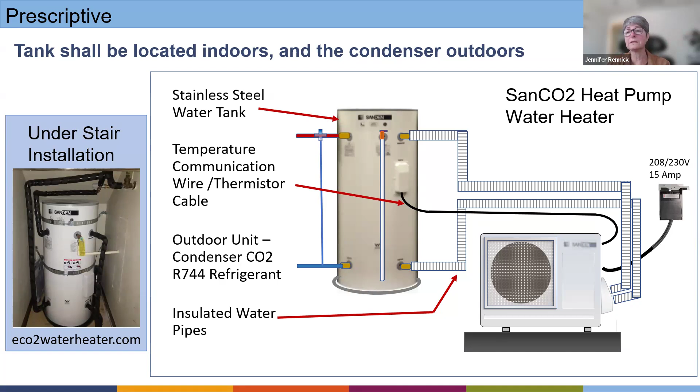Now, if doing the integrated heat pump water heater isn't working for your ADU because of space constraints, there is an alternative with the split system heat pump water heater, where you can squeeze in this holding water tank. It could fit into really tight spaces, like the example on the left where they squeezed it in underneath a staircase. There's no moving parts, no sound, no ventilation you have to worry about. And all of the working parts, the moving parts and the compressor, are outdoors. So it's more expensive, but it can be a huge space saving.

And then following up on this, because when you're doing ADUs, you often need some credit someplace if you're not going to meet those prescriptive window area requirements, or, like I'm saying, we keep seeing folks migrate away from the exterior wall insulation. Then they want to look at getting a variable heat capacity credit. And you can do that by installing a ductless heat pump for space conditioning.

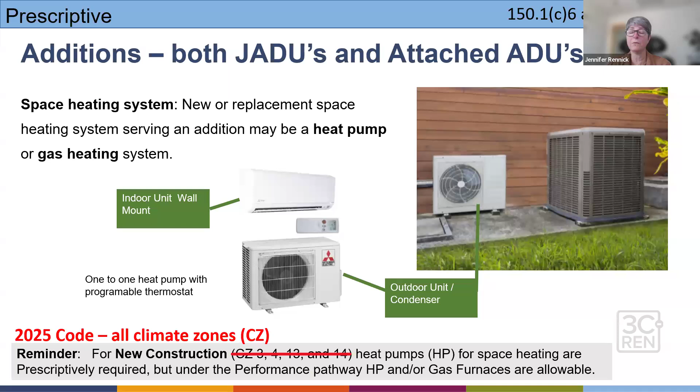Now, currently under the code, you can use a gas heating system. You won't get this credit, but it can meet the prescriptive in certain climate zones, but if it's not that climate zone, you've got to do the performance method. Now, new construction in climate zones 3, 4, 13, and 14 are heat pumps anyway, but under the 2025 code, all climate zones are going to be a heat pump system anyway. So the credit really comes into play by using a ductless system.

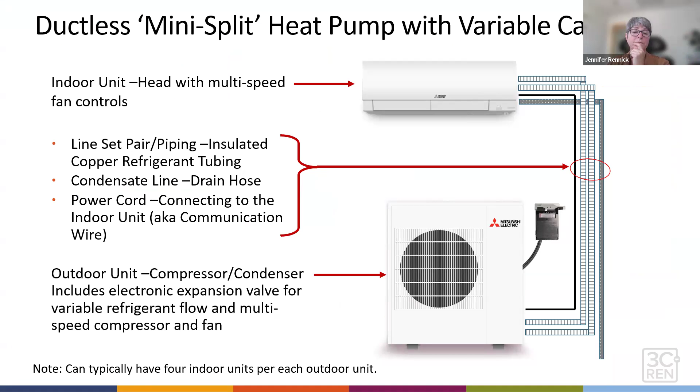And this is what the ductless system looks like. It can be wall mounted, ceiling mounted, but an outdoor compressor and an indoor fan coil. They install very easily. And for your ADUs, for example, if you have an existing house and you're doing an ADU addition or a garage connected conversion, you can often run the refrigerant line under the existing house, which makes the installation very simple if you don't want that outdoor unit to interfere with some other function on the outside. So there's flexibility in where you can locate these.

But you have to remember that for the ADU, you can't share the air with the primary residence, so it's not going to be a ducted shared air system. It has to be separate, although you could share the outdoor unit if you're going to upgrade your house. And there have to be separate thermostats.

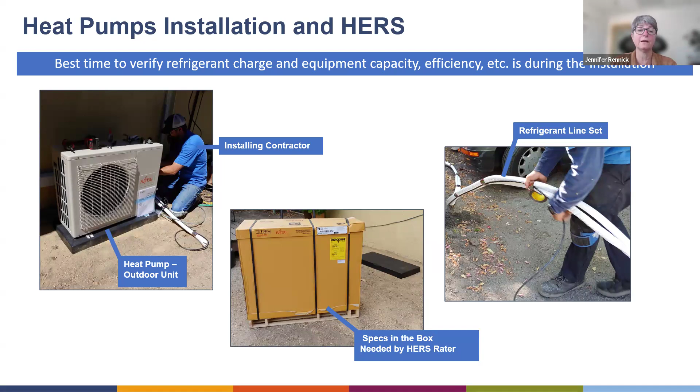The installation is really straightforward. Oftentimes you can mount the outdoor unit on a fiberglass pad that is just set on prepared DG or concrete with proper drainage. If not, you can wall mount them.

And then for the variable heat capacity credit, to meet that, the main living space and each habitable bedroom would need its own fan coil unit. It can be wall mounted, but the requirement is that the ductless unit is installed within the air barrier and the thermal boundary. So in this case, the air barrier would be taped and sealed drywall in the interior.

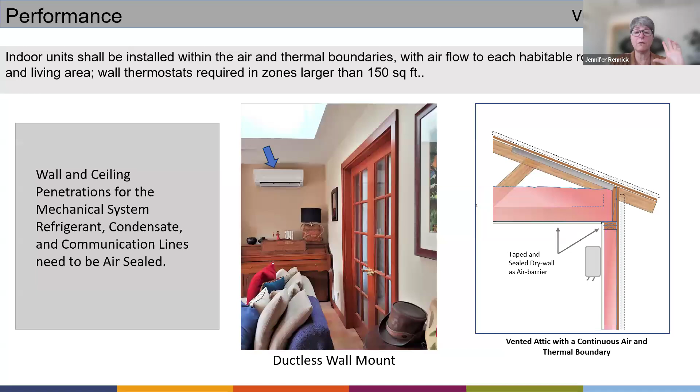And we have seen these ductless wall-mounted units be installed in an alcove, and that's okay as long as you meet the manufacturer's clearance requirements around it. And then that whole alcove needs to be taped and sealed with the drywall.

And same with the ceiling recessed units. So there's two ways you can do that. One is you can specify or build a drywall box essentially that meets the clearances that go up and over and around that ceiling recessed unit, and you need to specify that that's tape sealed and the drywall is acting

as the air barrier. Or you can do an unvented attic with your continuous air and thermal boundary to the exterior of your wall and to the exterior part of the roof deck, like by using a sprayed foam up in the attic to air seal it all.

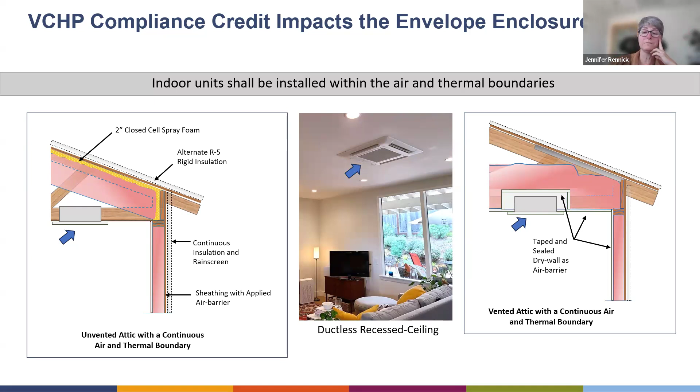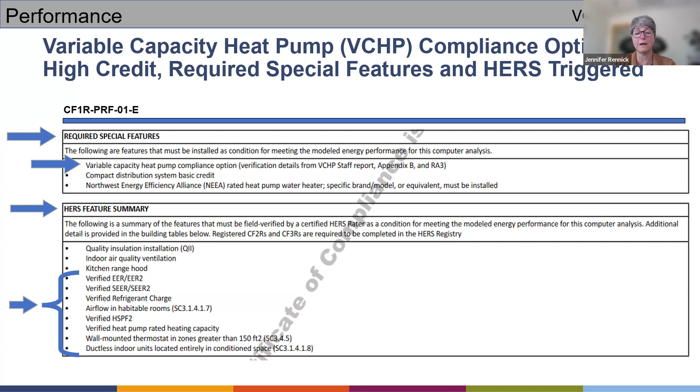And then with that, you do get credit. It's going to show up on your Title 24 report under the required special features. And it'll specifically say variable capacity heat pump compliance credit option that does require HERS features, and that means a HERS rater will come out and look at all of that and make sure that it complies. But you get a pretty decent credit in a lot of the climate zones in the Tri-County region.

And that kind of brings us back around for the architects and those who are on the plans examination side of it. For your builders and your installing contractors, we're highly recommending that you take a look at that Title 24 report you get and look at what those special features and HERS summaries are, and put that on the front sheet of your plan set so that it's really called out and really noticed.

Because if your whole plans are riding on the fact that you might be taking QII credit, a lot of air sealing's required, and there's inspections at framing stage and after the insulation is installed. If you're doing the variable capacity heat pump credit, you need the HERS rater to come out there, or ECC rater as it will be called.

And then if you are using one of the HVI rated ERV or HRV balanced ventilation systems, those also need the HERS inspection or ECC inspection as it's called. And I think the most important thing we're seeing that's really hanging people up is the heat pump water heaters, especially in the 2025 code, that's going to be coming up more and more.

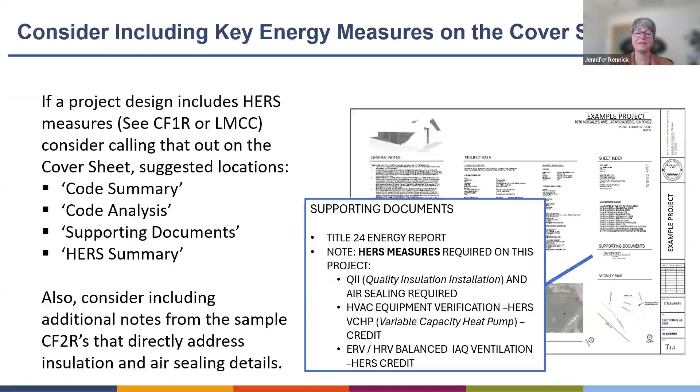Sometimes it's just 3 inches or 4 inches on 2 walls. They just need a bit more space and a different door specified or an ability to add the duct kit. But the water heater was installed next to a shear wall and structural doesn't want a big hole in that wall. Those things we're finding aren't really being coordinated. And with an ADU, it's trickier because the space is so tight. So that's my little coaching to all the architects on the call to make the whole project go smoother.